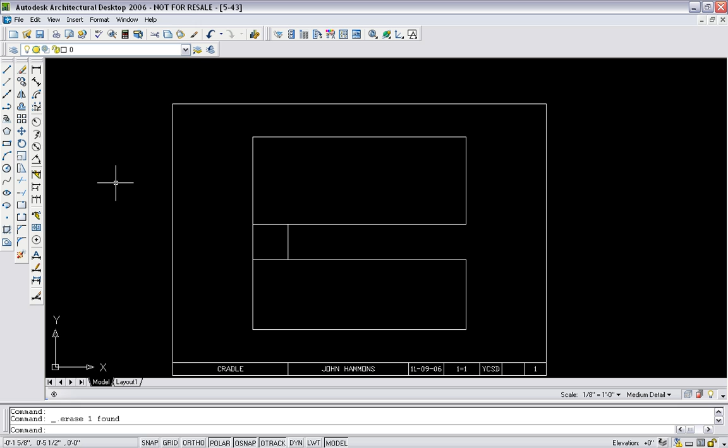Figure 5-43 on page 131 of the mechanical drawing textbook. You should be able to get to this point. We're only drawing two views from this problem, a top view and a front view. Notice I have them spaced 1 inch apart. I don't need this square anymore, so I'm going to go ahead and delete it.

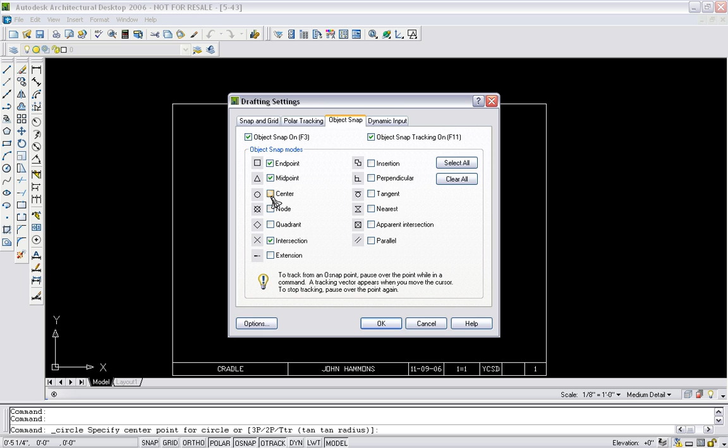Down the bottom, I'm going to complete the front view, and I'm going to go ahead and explode my front view. It was a rectangle. Now I've got it in lines. I'm going to choose my center point and the midpoint, and I'm going to make sure I have a midpoint right here. This is where my circle, 1 inch radius, is going to be. So I'm going to draw a circle from here with a radius of 1, and I'm going to go ahead and trim away what I don't need.

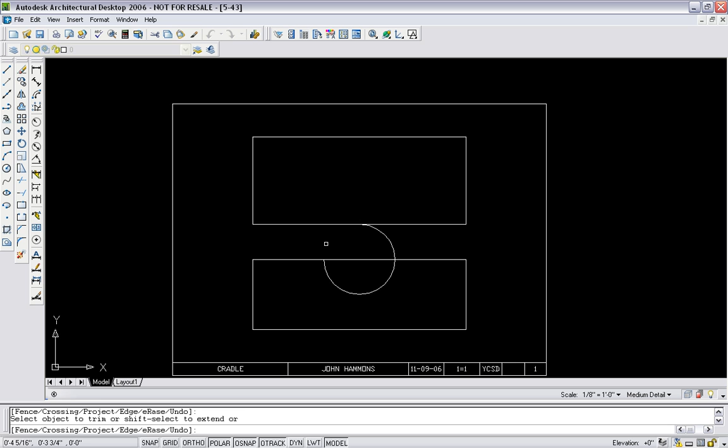Also, I'm going to offset. If you notice, the distance A is 3 inches. So if A is 3 inches, that means I have 1.5 inches on either side of A, the total distance being 6 inches wide. So I'm going to go ahead and offset a distance of 1.5. I'm going to offset this line and this line.

Alright, and I'm also going to offset a distance of 1/2 inch. The base is 1/2 inch, 0.5. I'll make this base, and now I simply use the trim tool to finish up what I'm doing.

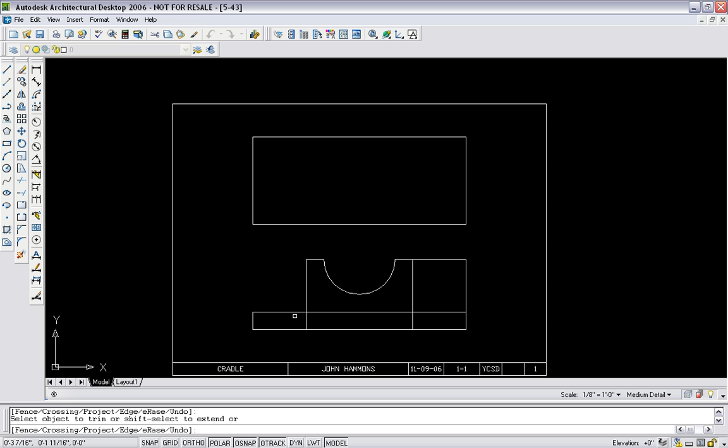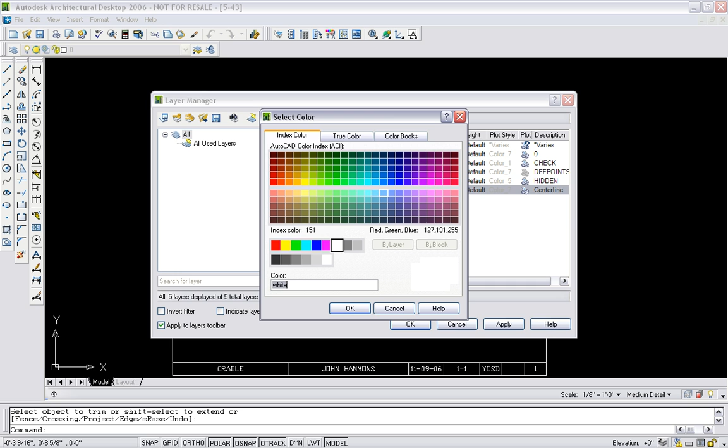I'm going to need a center line for this circle on both the front and top views, so I'm going to go ahead and create myself, if you haven't already done so, a center line layer. All center line layers are green in color, and they use center 2 line type.

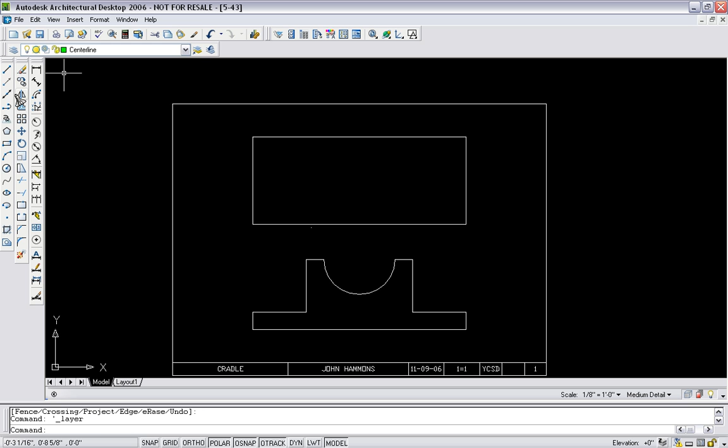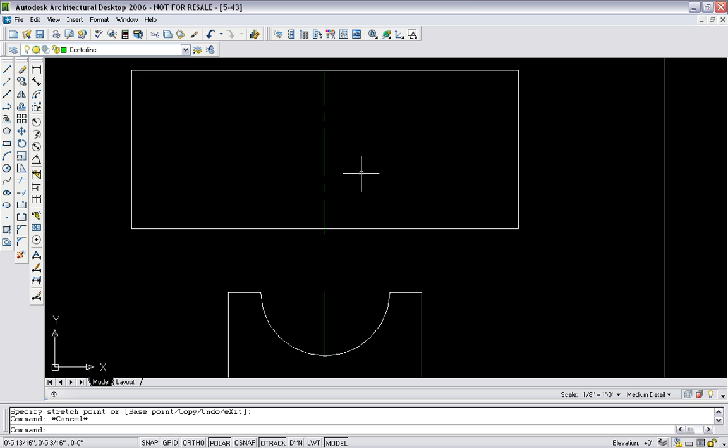I'm also going to draw a center line on this midpoint to that center point. I'm also going to need to project it up here. Don't need that one. All center lines should extend past the object, so I'm going to turn off OSnap, and I'm just going to grab these blue handles. I'm going to pull them about 1/16 of an inch past that object. That's the correct convention for center lines.

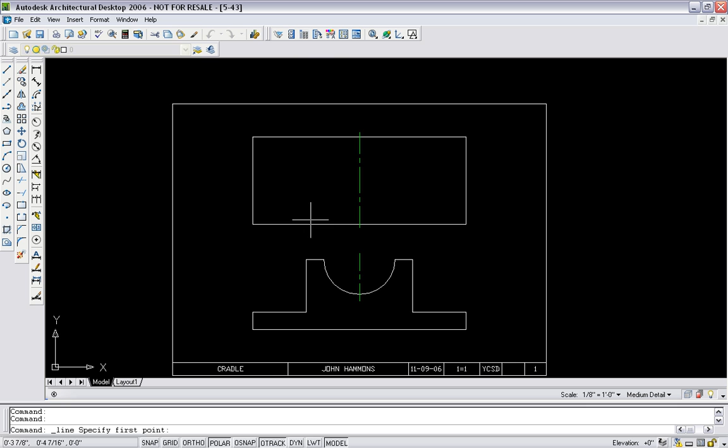I'm going to do the same thing here. There we go. Alright. I'm going to finish up my front view. I'm going to project my lines up. Turn OSnap back on. I'm going to see that edge, and these two edges.

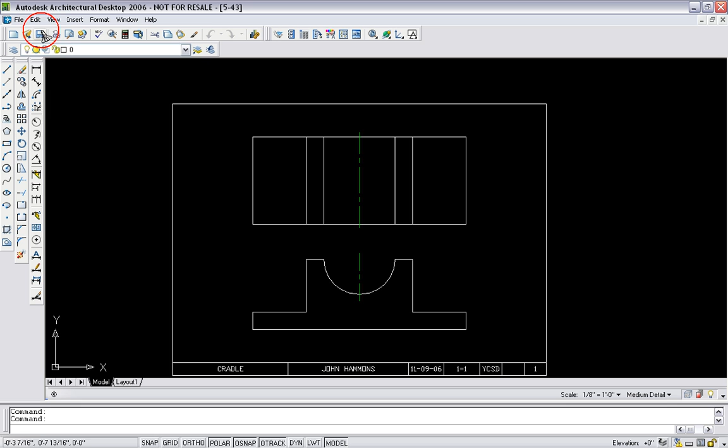And that's it. Figure 5-43, the cradle, should look very similar to what I have on my drawing here. That's the completed view. Don't forget your center line. Change the description to cradle, name, correct date, 1 = 1 scale, and your high school.